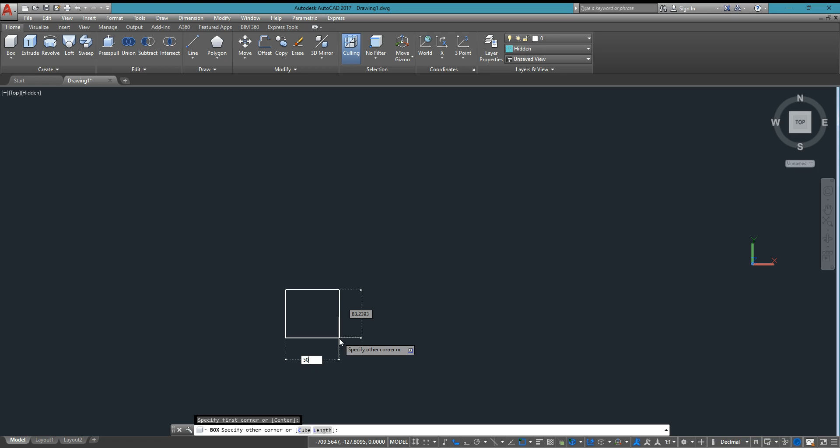We will have to create our 3D object because solid editing is for 3D object only. So we will have our box. We are on top view doing this, so let's have 50. And then we have to change our 3D view to perspective view. But then if we want to change our view on right, we can see already our box is already a solid object because there is a height given, no? So we will change to a perspective view so that we could use our visual style also.

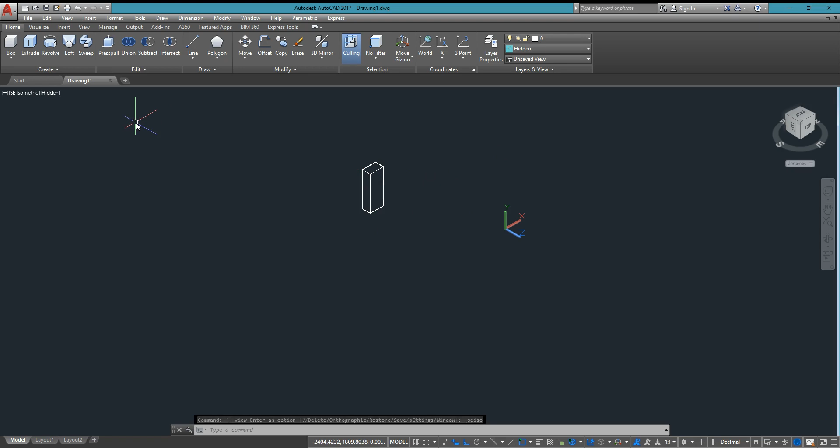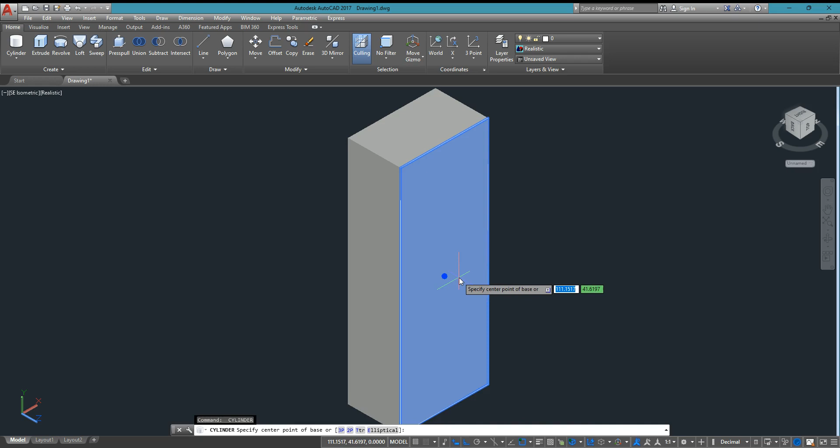How to use visual styles of realistic. So magnify a little of our drawing. And then this body of solid, which is box, we will have to try a cylinder on this surface of our box. The front surface is here. And then we could use a 25 value of a cylinder, so we could embed this part of the solid cylinder to the body of the box.

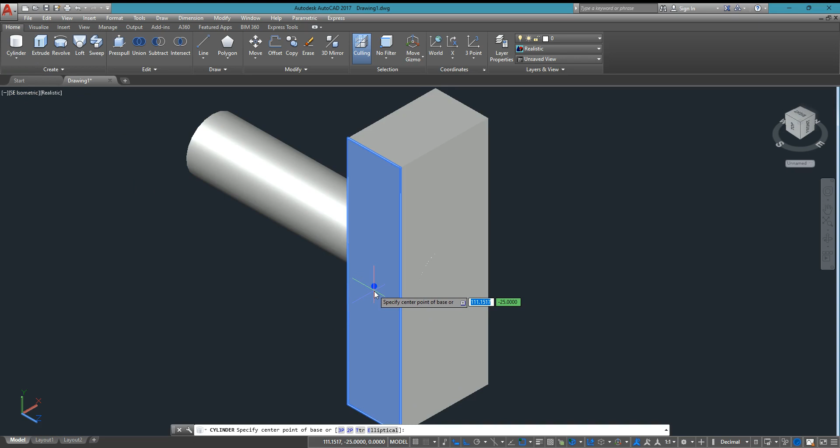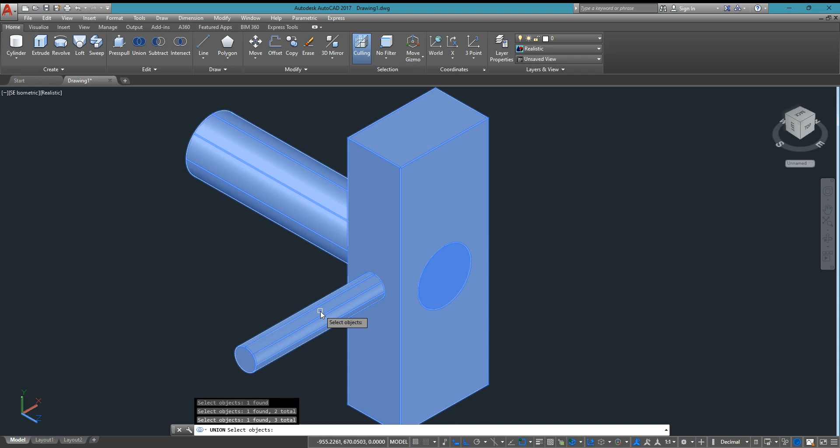Another cylinder. Let's try our 10 value. So we try to get this part of the cylinder and then let's try union. So a three body of solid, we will union. Enter the command of union and then the body, which is the box and the cylinder and the another cylinder, enter. And then we will observe that these three objects of box and cylinder are now into one object. So with the union command, we will make them in one. The three body of solid now is in one body when we use the union.

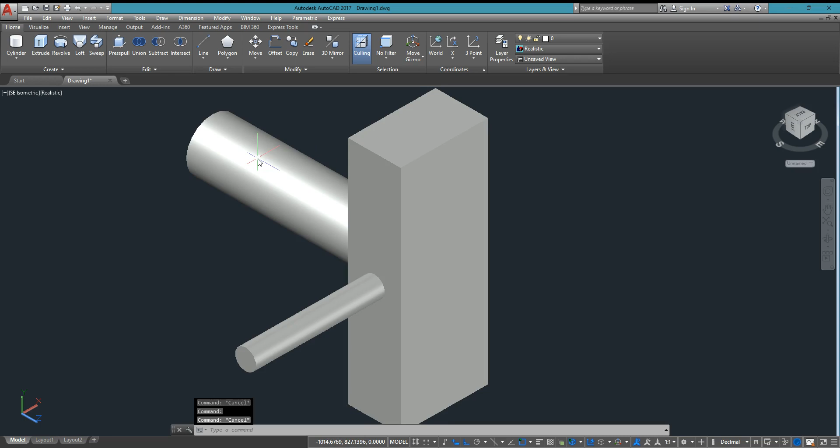How about the subtract command? So let's have again the box. We are following the parallel z-axis vector and then we will have now our cylinder or box or whatever drawing you want to use. Let's try here a value of 20. Then we will embed the part of the cylinder on the box body, which is on the side. Let's have 20, and then let's have embed. And then we will use subtract.

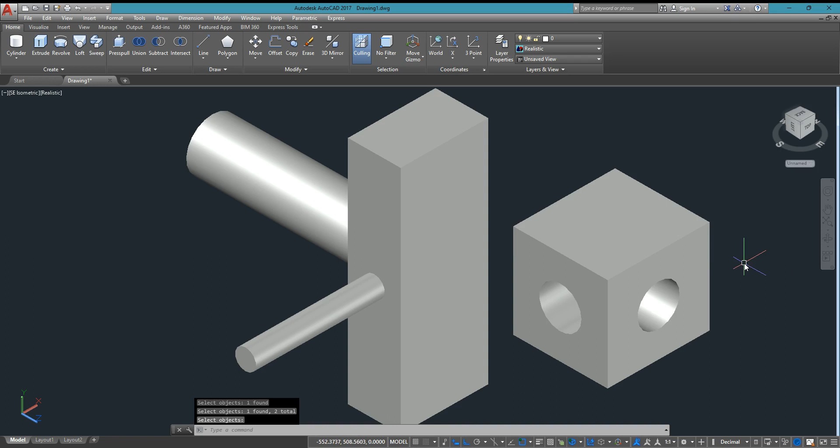So the body of 3 solid now, we will select the body, which is the box, enter. And then this body that will subtract to the box is the 2 cylinder. And what happened to this? The body of the box is now subtracted the part of the cylinder to the surface of the box. So meaning when you subtract from the word subtract, na-eliminate yung part ng cylinder sa body ng box.

So we can now use our box again to perform the intersect. Then we could use this, then 20, then we will intersect this to the body. First is the box, and then the second body is the cylinder, enter. So how come that will be intersected, cylinder to the box is now eliminated, no?

So part of the cylinder and the box itself are eliminated from the intersection of the body of the two solid. Two or more body of solid, we will perform a subtract, union, and intersect command. And how about the press pull? We can also stretch our solid using our press pull, so lengthen or stretching our drawing. So that's all we can use for our solid editing.